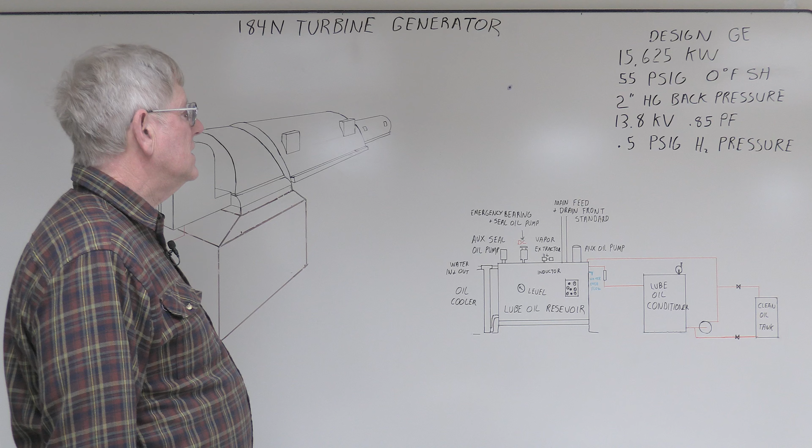It was designed for 55 pounds steam pressure, 0 degrees superheat, and a 2-inch mercury back pressure. It ran at 13.8 kilovolts and is rated for a 0.85 power factor.

The main parts we had up here was the front standard, which had the governor, thrust bearings, and your main oil pump, plus your control on it. Up here you had your steam admission valves. Here was the steam turbine. It had 2 stop valves on each side that would feed the high pressure part of the turbine. Then went over here to the low pressure. This would be the low pressure housing, went down to the surface condenser.

Had the hydrogen cooled generator. These were the hydrogen coolers. In back they had an exciter. This is a dynamic type exciter, and the Amplidyne that ran that sat on the 3rd floor by the control room.

Down below on the 1st floor you had your lube oil reservoir. It'd sit about in here. Had your condensate pumps, lube oil conditioner. These were up by the ceiling, underneath the floor, your stop valves.

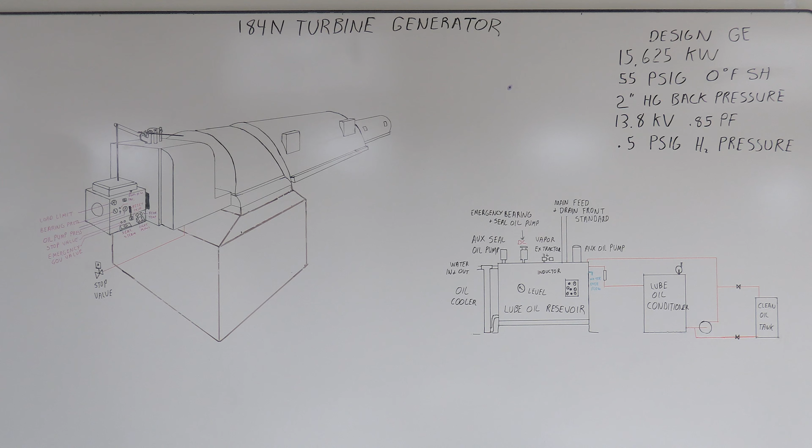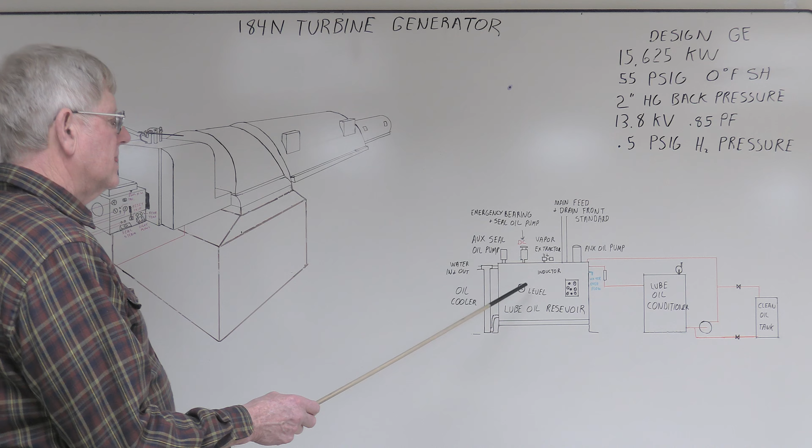On the lube oil system, you had your aux oil pump. This was for starting up the turbine with, and for emergency use. The oil from this went to an eductor that fed the oil up to the main oil pump suction. Once your turbine got up to speed, the oil off your main oil pump went down to the eductor and pushed oil back up the suction to the pump.

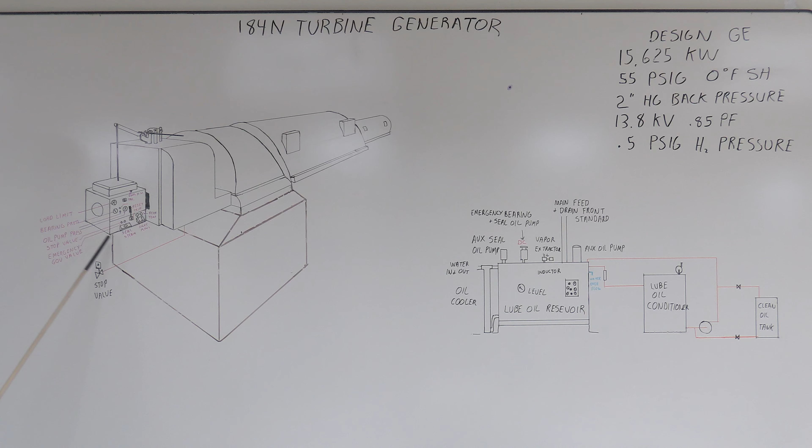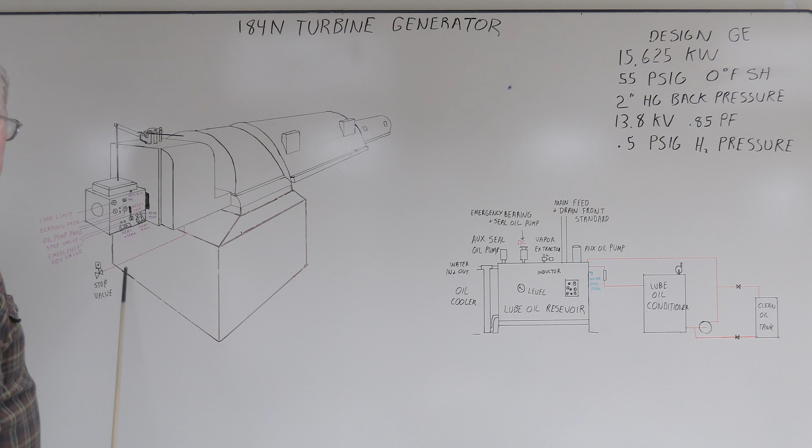This unit only had one oil system that ran everything on it. So off your main oil pump, when it was running, it would provide oil to the bearings, went through a cooler and then a reducing valve and put about 25 pounds oil pressure to the bearings. It provided control oil to the stop valves and your governor valve cylinder.

It provided oil to the 0 speed switch, which was 2 orifices sitting close to a plate with notches, so when the shaft stopped, the notches would be dumping oil, and you'd have a low pressure so you know your shaft stopped, so the turning gear would start. Turning gear sat back in here.

It also provided your thrust bearing wear. Another nozzle would put oil pressure against the nozzle, and as it wore, the pressure would drop. Had more of a clearance between the nozzle and the thrust plate. I'm not sure what this tripped at, it's probably around 18 thousandths. There's a really tight clearance in these turbines. The last thing you want to do is to crash it.

The back end was solid, and this had flexible standards that allowed the thing to slide this way for expansion.

On the control, you had your governor in here, flyball governor, and also automatic control for load control on this. It ran a hydraulic cylinder with a spring on it. This rod would go up. There's the gears on the end of the shaft here, and it'd engage with gears on a shaft, which would go up and down. This would turn the shaft.

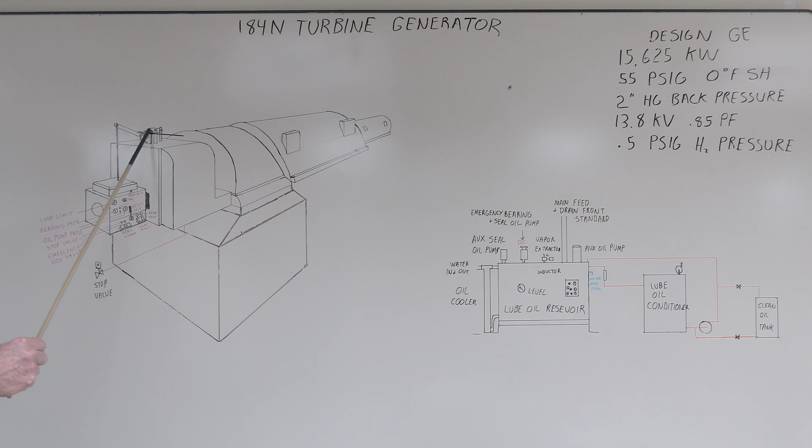Then there are cams on this that would lift up each of these governor control valve rods. There'd be 4 of these. So it's designed so that as this moved, first one set of valves would open, then the other. So you would slowly admit steam to the nozzle block. Full steam flow of the nozzles would be open, and you'd have full admission of steam into the nozzle block through the turbine.

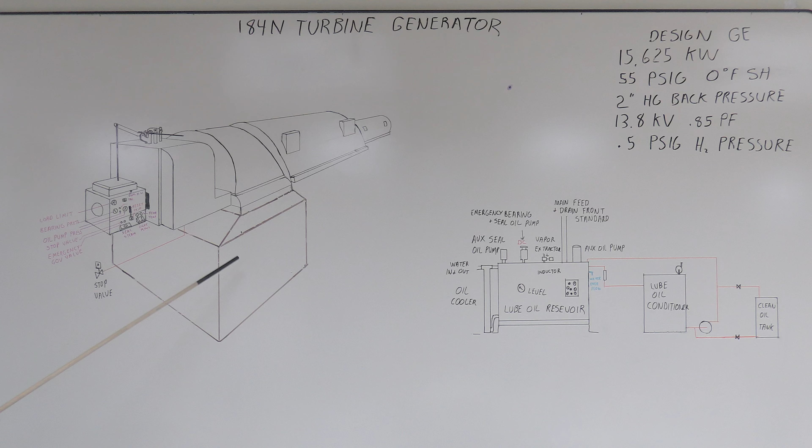The front standard, you had your seal steam regulator. It sat in here. It provided steam to the front seals and the turbine seals. At startup, when you're pulling a vacuum on this, you'd have to use sealing steam to seal it. But once you're running, you'd take the excess steam off the high pressure side and feed it back to low pressure. I'm not sure if this was ever self-sealing like some of them, but a lot of the steam from here would be recycled and put back to the low pressure end, and any makeup steam to this was added.

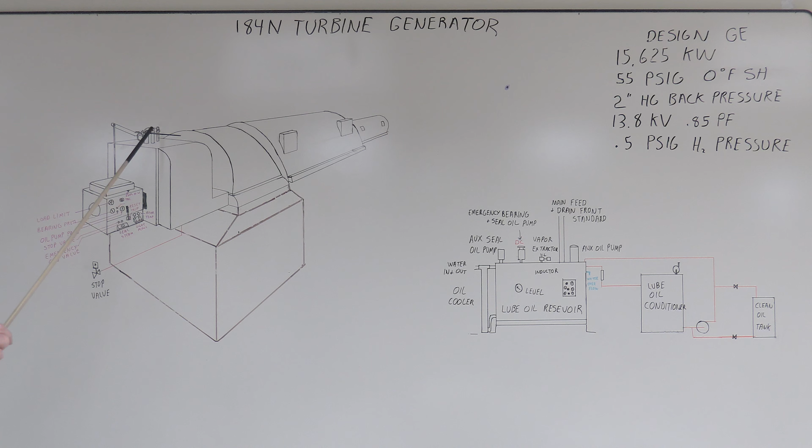From there, your exhaust steam would go out to a spray chamber, and then you had a little vacuum pump. So sealing steam would go in, part would go into the low pressure side, and whatever leaked back out would be collected through a spray chamber and then a vacuum pump so you didn't have steam blowing out. You had packing bleed offs on all the governor valves and your stop valves. That all went back there.

To start this, you had your load limit. This is where you'd bring the speed up. You had your trip reset lever.

There's a trip button down here you could hit to trip this unit. On the other side was the bolt on the shaft that'd come out and hit a plate at high overspeed and dump the oil. You also had your electric trip solenoid that would dump the pressure to the unit.

So to reset it, you'd have to pull this. This ran the speed up for starting it. Had a tachometer, and this had several critical speeds. Usually you have critical speeds with your turbine, your generator, and then your exciter, so you had to get through those fast.

Once it was up and running, then they'd take over from the control room and run this. You could sync it online, and then once the plant was ready to start, you'd split it so this ran all the equipment. Big thing was keeping this running the same frequency as the A bus.

I know they looked at clocks and tried to match the clocks, changing speed up and down a little bit so the clocks ran about the same. You had your bearing oil pressure, oil pump pressure. These are valves here for the two gauges.

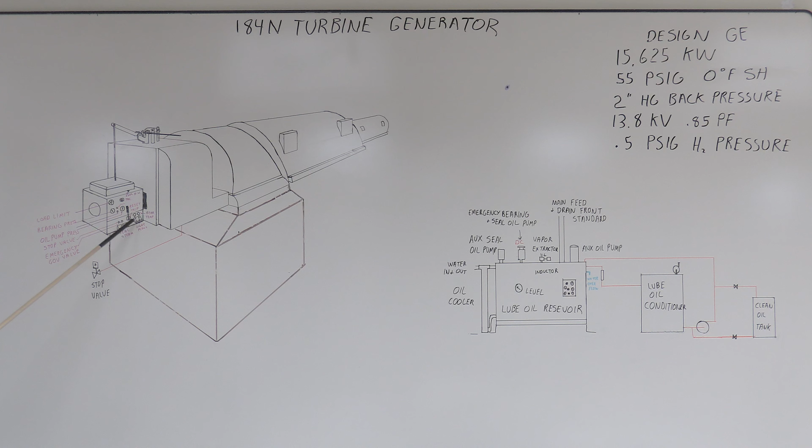You had your stop valve test, emergency governor valve test. These could be open and your valves should go partially closed and open back up again. You had sight flows and temperatures for your main bearing and also your thrust bearing. Thrust bearings are really critical on these because they're running such tight clearances.

Now you had your vapor extractor. This always kept a slight negative pressure on this, all the oil system, to keep oil vapor from coming out. You had your DC backup, emergency bearing and seal oil pump, and then you had your aux seal oil pump.

We have hydrogen in here. You have to keep your seal oil on this thing at all times. Half a pound is not a whole lot, but it had several different backups to keep the seal oil in. And also if it shuts down, you have to keep bearing oil on this because you've got a hot shaft and it can damage the Babbitt bearings.

You had a cooler on the outs, two oil coolers. One was used at a time for temperature control. Usually your oil temperature would be around 115 degrees. You figure about a 30-degree rise in the oil temperature, so it'd be about 150 something coming back in.

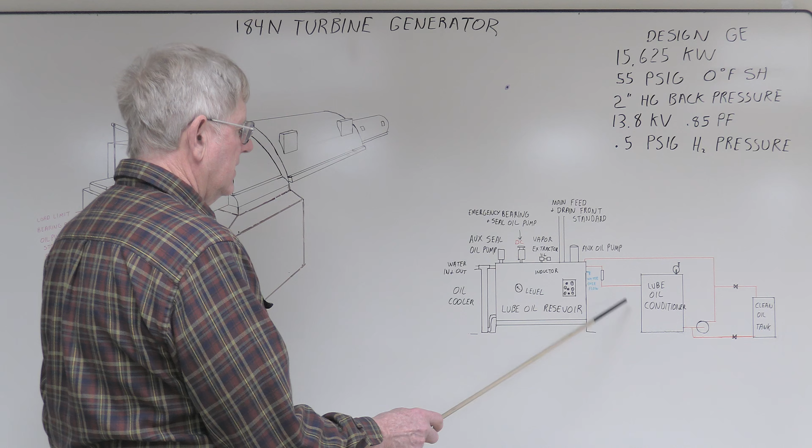These were your test panel for running your different pumps for testing. Had lube oil conditioner, it had like water overflow and stuff on it. Had a clean oil tank, a little pump to bring the oil back. This had a vapor extractor on it.

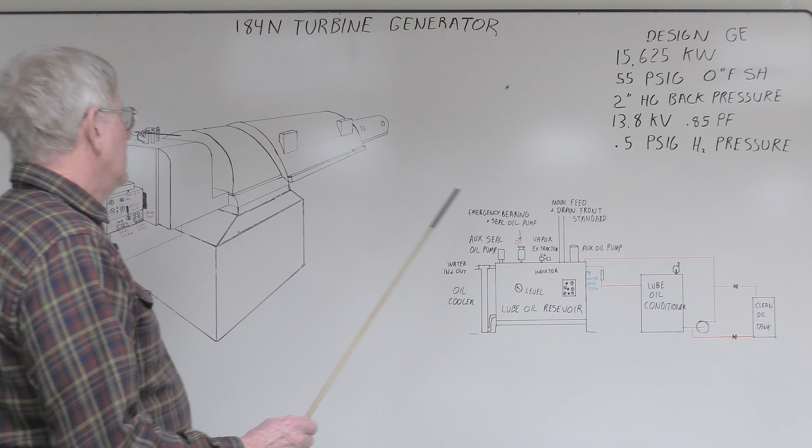Your generator hydrogen seals, it was a simpler system. It used the regular lube oil, it'd feed to the seal. Part of the oil would go out with the main bearing oil down to bearing enlargements that had a vapor extractor pump to take any hydrogen off and blow off any oil.

The hydrogen would come back with the oil. Then the inside, on the hydrogen side, went down to enlargement, and that was at a float control basically that kept oil in there, and that went back to enlargement too where any vapor was taken off. You had a regulator that maintained the pressure of seal oil above the hydrogen.

I'm really not sure what this ran at, but it's probably 5-6 pounds, I'm guessing. I looked at the pressure of the oil and the hydrogen seal enlargement compared to the oil going in, and tried to maintain the oil going in a little bit higher than the hydrogen pressure.

So the big thing on this is that all that oil just went back to your reservoir. I believe it was all like guarded piping, so if you had any leaks, it was all collected back.

You had your hydrogen control panel sat down in here somewhere, second floor, and that's where you look at your hydrogen purity, feed and bleed.

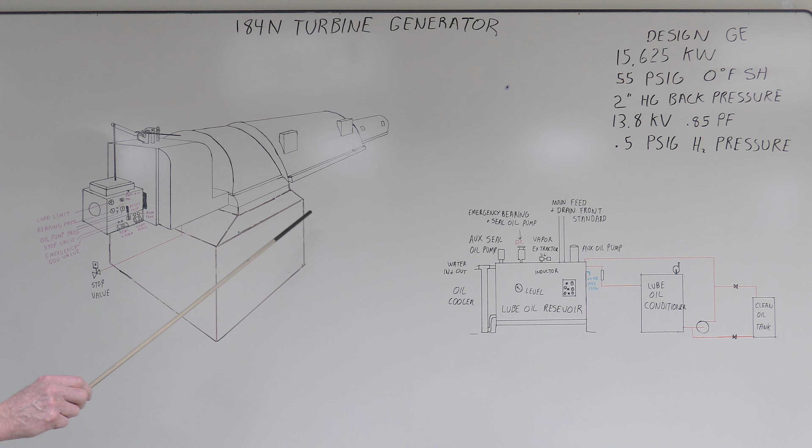Outside we had a little shack that had 3 hydrogen cylinders you'd have in service at all times, and a couple hydrogen bottles. I believe we used 2, and then you'd swap. When they got down lower, it didn't seem like it used a whole lot of hydrogen.

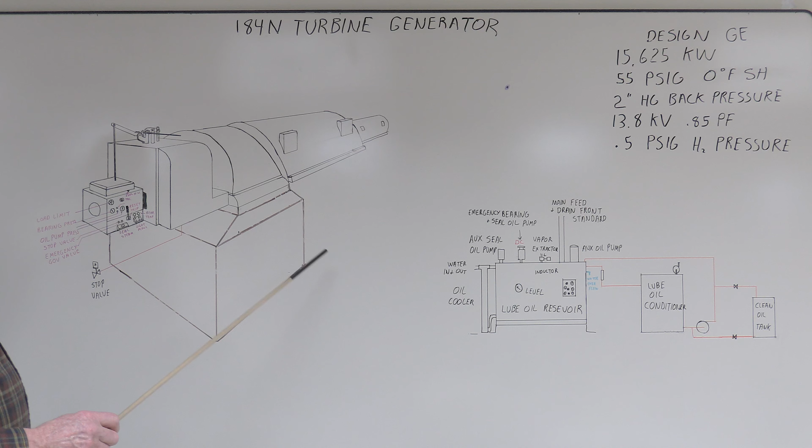Exciter housing had brushes in it. Electricians check that.

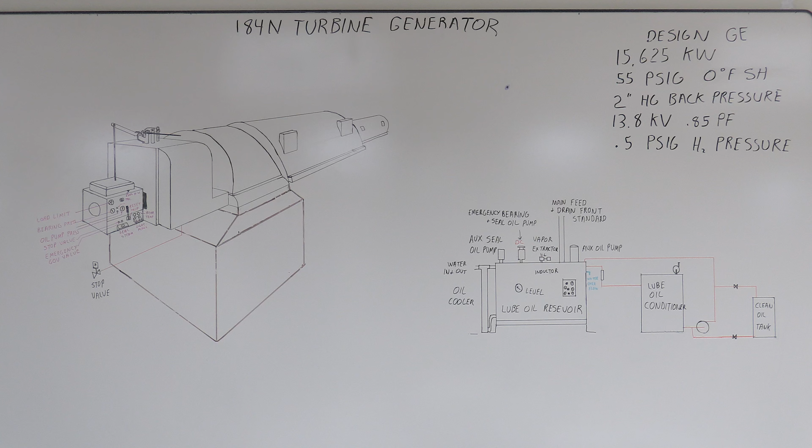Yeah, this is about all we have on the 184 turbine generator. We do have more information on how it was built and worked if anybody's interested. But that's just kind of a quick overview of B-bus power in the 100N plant.